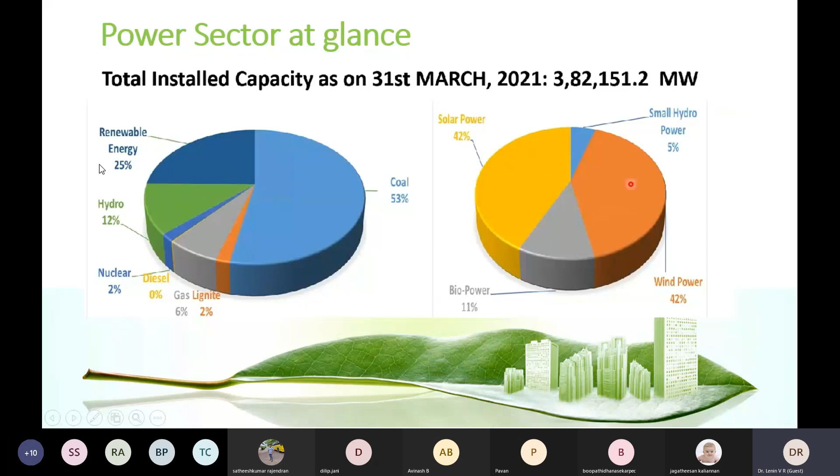So the major portion of the energy comes from thermal power plants, right? Only about one quarter of the energy comes from renewable energy, in total India. We know this: it is nothing but electricity generation, transmission, and distribution. So what does it mean? The major portion of electricity comes from thermal power plants.

In a thermal power plant, fuel is burned. The heat energy is transferred to the water. Then water is converted into steam. The steam is forced onto the turbine. The kinetic energy of the steam is converted into mechanical energy. The generator is coupled with the turbine, so the generator generates power.

Excuse me, sir. Yes, sir. There is a noise in your background, sir. Okay. Now is that okay, sir? Yes, sir. Fine. Just a moment. Now my voice is audible, sir? Is that clear? Yes, sir. Audible.

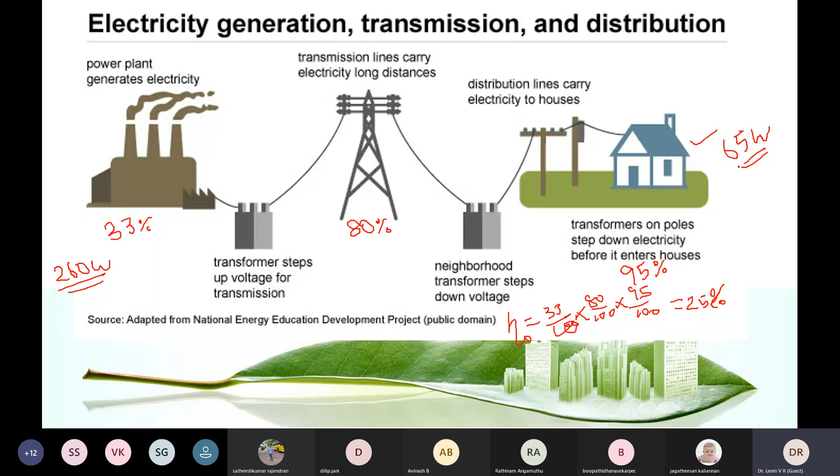We want to enjoy the benefits of the fan, right? So 4 times the equivalent energy has to be burned by someone far away from your place. So we should burn something like 4 times 65, that means 260 watts equivalent of energy has to be burned in order to get 65 watts of fan energy. So these many problems are there.

Then coming to the energy scenario in India, we are the 6th largest energy generating nation, and we are the 6th largest end user in the world. And conventional power generation is gradually increasing because demand is high.

Next, there is a gap between the supply and demand. The domestic sector consumes more energy. So this is all about the energy scenario. Coming to this next chapter, this is a very new one.

So here we have energy poverty. Energy poverty is the shortage of energy access to the modern world. We are calculating this energy poverty by an index, the human development index, which is an indicator. India's HDI is 0.639, so we are in 129th position among 188 countries, which means we are unable to access the energy to meet the modern goals or modern technology.

Coming to the building sector, according to the Bureau of Energy Efficiency, around 75% of the energy is consumed in the building sector, in which 30 to 60% of the energy is consumed for thermal comfort alone. And recently our government made a policy, housing for all. You might have heard about it. Housing for all by 2022 may bring new residential buildings up to some 3 crores and even more, according to government policy.

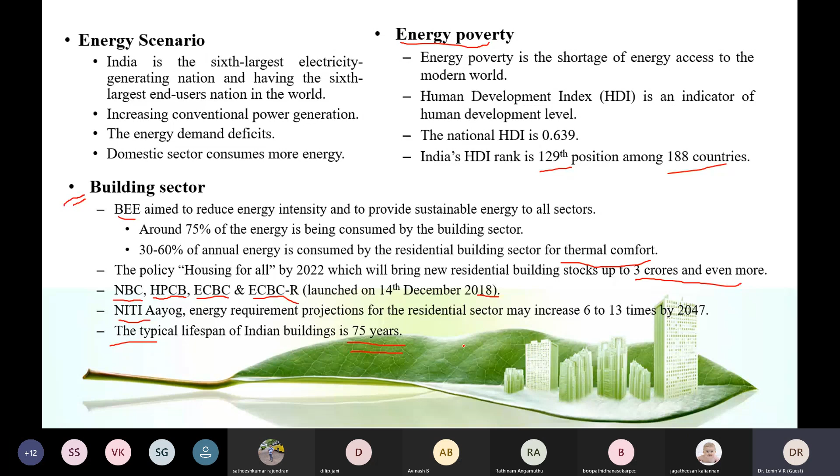This is very important. The typical lifespan of an Indian building is 75 years. I made a survey some 3 years back with several factors, a 52-question questionnaire. The important one, as you can see here, is the age of the building. Most of the buildings were constructed within 20 years. As discussed in the previous slide, the lifespan of a building is 75 years, so if the buildings are 20 years old, those buildings still need to go 55 years. So that is a very important thing.

The second important thing is that most of the energy is consumed during the building operation stage. What is the operation stage? It may be a little confusing. It is after the housewarming, when we enter or occupy the house. Whatever energy you spend inside the house after occupying is the operation energy, calculated until the building is demolished. So for buildings that still have 55 years to go, 89 to 93% of the energy is consumed during the operation stage. I was shocked when I saw this.

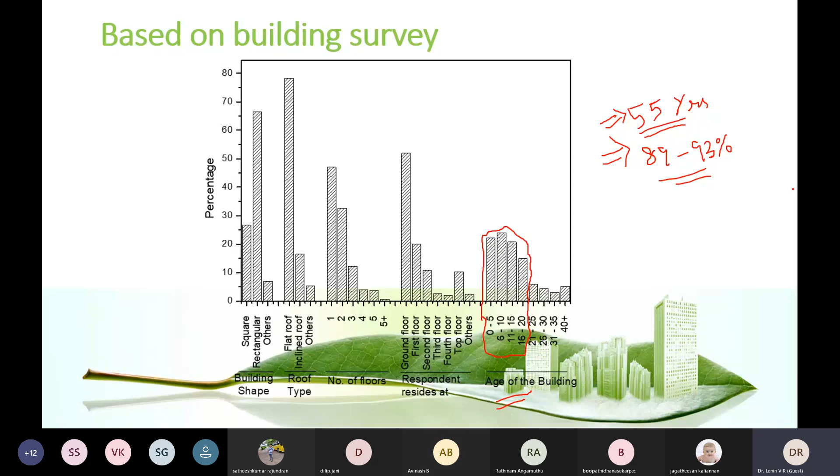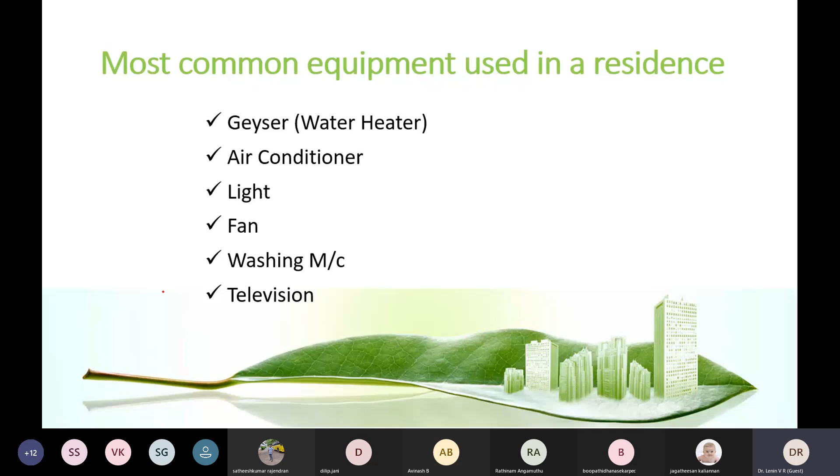In our residential buildings, what equipment are we using? Mostly geyser, air conditioner, lights, fan, washing machine, and television. These are the most common equipment for our routine life. None of this equipment runs without electricity. All require electricity, since most are based on mechanical parts. Without electricity, it is not possible to run them.

For supplying the energy, we have so many energy sources. As you know, oil, coal, natural gas, and nuclear come under renewable and non-renewable energies. Renewable energies are wind, geothermal, solar, hydropower, and biomass. So many types of renewable energies are there.

We are trying to phase out non-renewable energies. So renewable energies are what we are concentrating on nowadays, right now.

There are 7 different types of renewable energies available: hydropower, wind power, solar energy, biomass, geothermal energy, ocean energy, and hydrogen energy. Among these 7 energies, not all can be utilized or generated by a single person.

As an individual, I wish to contribute towards sustainable development. If I wish to go for these renewable energy technologies, let us see what technology is possible and what is not.

Hydropower is basically dam based. As an individual, we cannot build a dam, so this energy may not be viable.

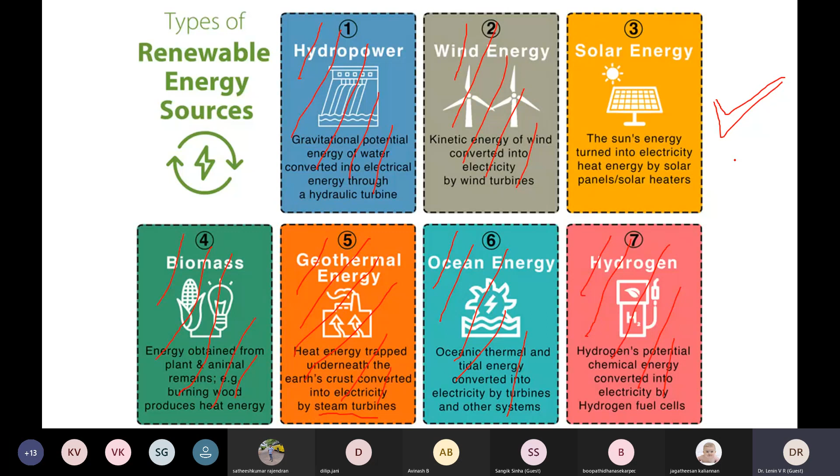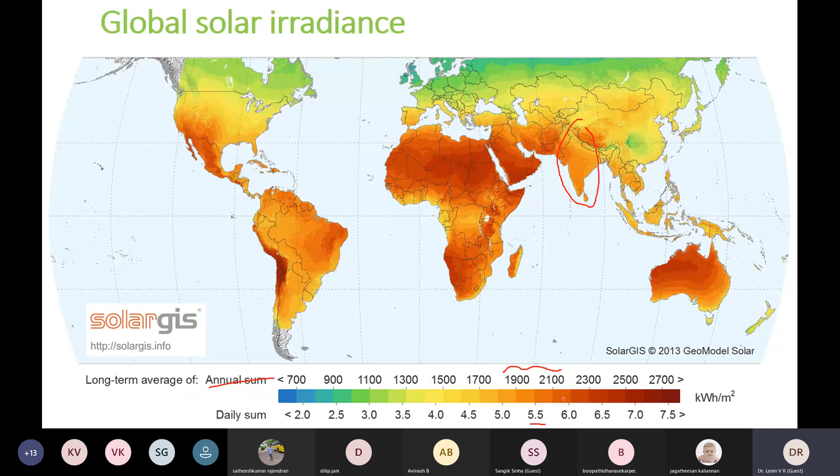Solar energy can be utilized in several ways. As we discussed earlier, when we convert one energy to another, there will be a loss.

What we are doing as of now is procuring electricity from some agency and converting it into a useful form, like geysers or hot water heaters. For that we are utilizing energy, so what will be the efficiency of that? Already only 25% of the energy we get from the thermal power plant, so if you convert this energy again into thermal energy, there will be further loss.

Solar energy can be converted into two forms: solar thermal energy and photovoltaic energy. It depends on the requirement. Every house requires hot water, so for that we can use a solar water heater.

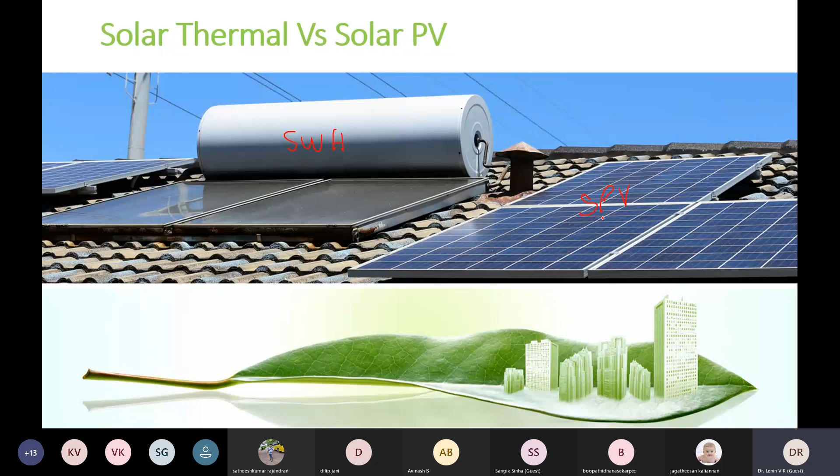This shows the solar water heater, and this one is solar photovoltaic modules, this is the cost. We have two options here. I'm telling you the feasibility in the building sector. In my survey, I have conducted research on one more thing.

What are the equipment used by an occupant to have thermal comfort? Only two equipment are used by these respondents: a fan and an air conditioner. Ceiling fan users are 88%. That gives some negative impact actually - it's a very worst usage. I'll tell you later why we are using it, why we should not use the ceiling fan.

Air conditioner usage is about 48%, and non-users are something like 52%. This calculation may have to be revised because I conducted this survey 3 years back, but things are changing now. Apart from these two technologies, around 90% of respondents responded that none of the other cooling energy methods are followed, which means they are relying only on fan and air conditioning.

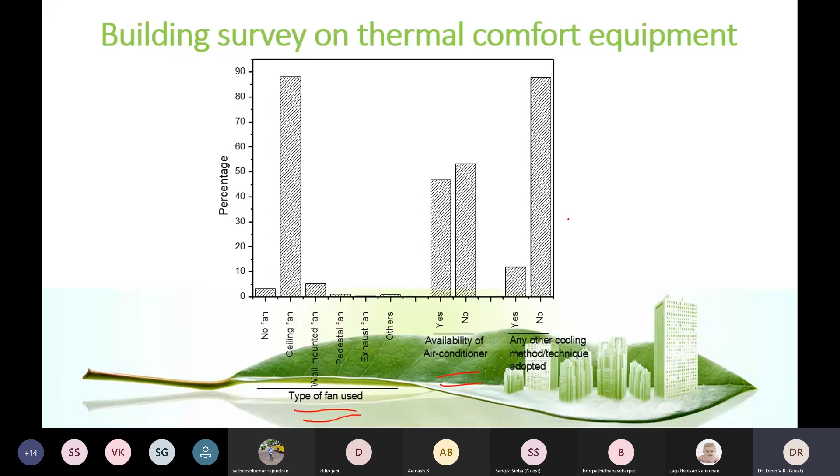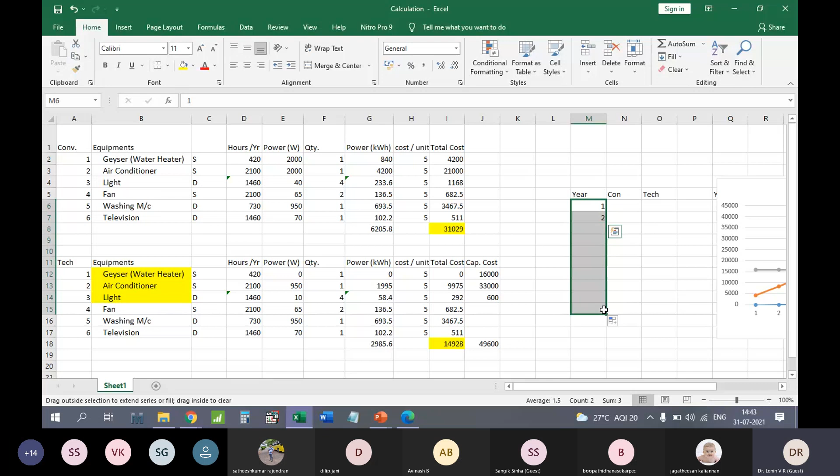So again, taking the previous case, conventional method versus technical upgradation: in the first year, second year, up to the 10th year, you are spending money while enjoying thermal comfort by means of AC. So 21,000 you are spending in the first year on electricity. Second year also you get the same 21,000 plus previous, so at the end of the second year you will be spending 42,000. Like so, if you continue enjoying thermal comfort, at the end of the 10th year you will be spending 2,10,000 rupees.

If you are upgrading to this latest technology, initially you are spending 33,000, that is the capital cost. In addition, you are spending something like 9,975 each year on electricity. So the initial cost, the first year cost, will be high, then each year there will be 9,975 as the cost of electricity.

21,000 actually makes 2,10,000 cost after 10 years you may be spending. So when continuing with the existing or older technology versus upgrading, you will be getting benefit. Let us see when we get the break-even: exactly from the third year onwards, you will be enjoying cost savings.

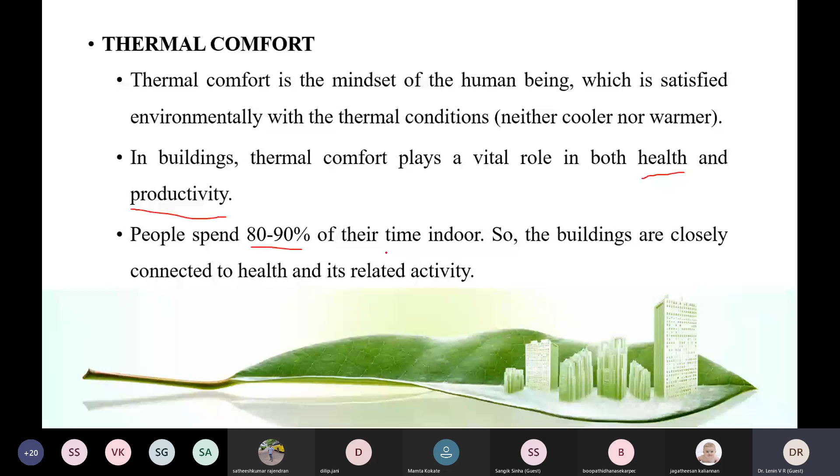In buildings, thermal comfort plays a major role. Why? Because we need to have a healthy and productive environment. So why is thermal comfort needed? People spend 80 to 90% of their time indoors. So buildings are closely connected with health and related activities. So we should have thermal comfort. If we do not feel comfort, then whatever we are thinking goes wrong.

So coming to the basics of building heat transfer. A building receives heat from the sun by means of radiation. Once it strikes the outer surface of the wall, from the outer surface to the inner surface it transfers through the conduction heat transfer mode. From the inner surface, it is convection. This convection heats up your indoor environment. In addition, indoor heat sources like human metabolism, equipment, and lighting heat up the indoor environment.

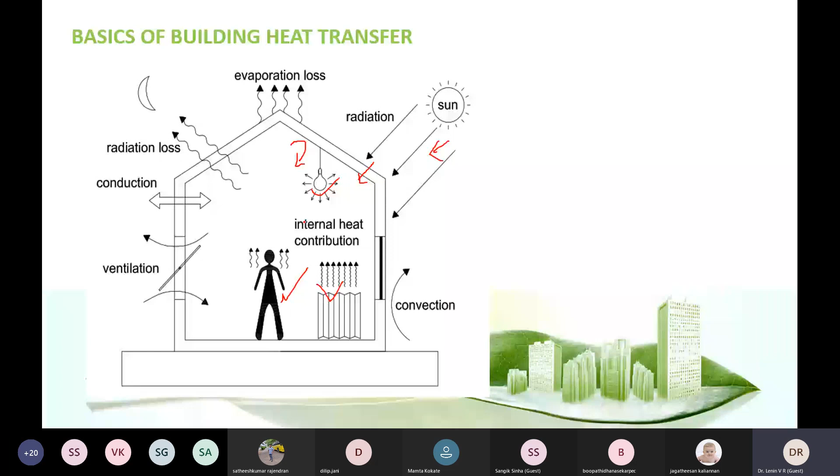So once your indoor environment is heated up, then you cannot feel comfort, then things go wrong. So in order to avoid that, usually we use several equipments, right? So before going to the equipment side, we should know what our environment is, because even a single solution may not be suitable for all people's lives. So we should know our environment first, right?

So according to this climatic zone map of India, India is classified into some 5 climatic zones: hot-dry, warm-humid, composite, temperate, and cold. Most of our South India and East India are classified under the warm-humid region. So what is the meaning of warm-humid? Air is a little bit hotter than the normal or the required one, and already the relative humidity or moisture is available in the environment. So based on these two things, comfort plays a role.

In order to have comfort, most preferably we use two equipments. One is the air cooler. I am speaking practically, about whatever equipment we have. So which one is preferable? Can you tell me? Air cooler or air conditioner? Most probably people prefer air conditioners or AC. Yes. So why? Because in olden days many preferred the air cooler, but now people want more comfort, so we go for AC. Yes, perfect.

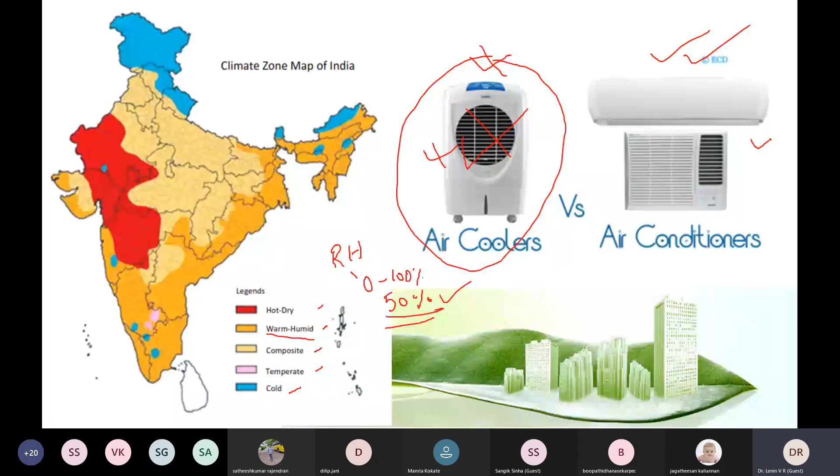There are 6 factors that affect thermal comfort: air temperature, relative humidity, air velocity, mean radiant temperature, clothing insulation, and metabolic rate. First, air temperature: as per ASHRAE standards, 26 degrees centigrade is an acceptable or thermally comfortable temperature. Coming to relative humidity, 26 degrees Celsius with 50% relative humidity is sufficient to have good thermal comfort. Then air velocity. Air velocity can be varied from 0.2 to 1.2 meters per second.

Mean radiant temperature, it's all about that environment. So today we need not speak about it. If time permits, later we will speak something about this. And coming to this clothing insulation.

So clothing insulation, actually when we are wearing shorts kind of a thing, that will come 0.2. If you are wearing pants and shirt, that will come 0.6. Clothing, CLO is the unit. Okay. So maximum, if you are wearing winter wear, that will come 1 clo. Right? So this matters a lot.

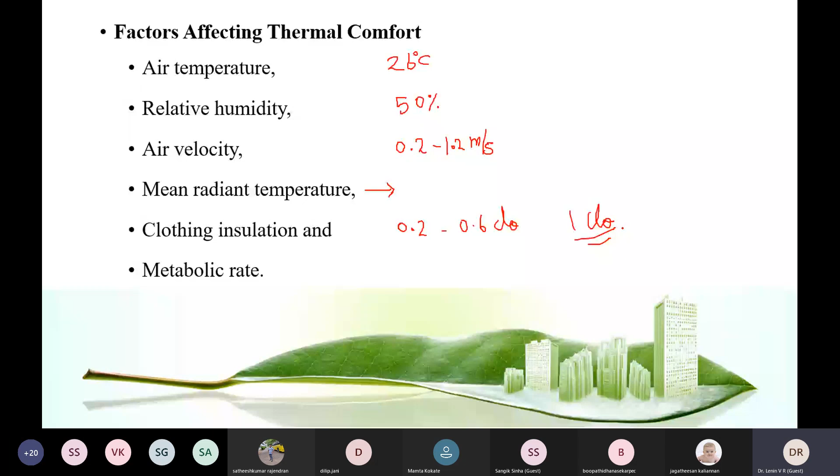If you are wearing winter wear, and if you are keeping the ambient temperature or air conditioned temperature at 17 degrees, then it won't give you thermal comfort. Correct? Then you have to keep minimal conditions like our environment. You should keep minimum clothing insulation. Like a pant shirt, somehow it's okay, 0.6 clothing insulation. That is required, right? So coming to this metabolic rate.

So we ourselves are generating heat. Why? Because we are taking food. That food is converted into energy. During conversion of that energy, an exothermic reaction takes place. Because of that reaction, our inner body temperature is 37 degrees Celsius. Our atmospheric temperature is 27 degrees Celsius. So because of the temperature difference, heat is transferred from our human body to the atmosphere. In that manner heat is transferred, right?

So depending on the activity, the heat liberation rate will vary, right? Energy is being spent. So when we are sitting, 100 watts will be spent, right? If you are doing any heavy work or exercise, something like 900 watts equivalent of heat will be released. So this metabolic rate will normally be mentioned in the unit met. That can vary from 100 to 900.

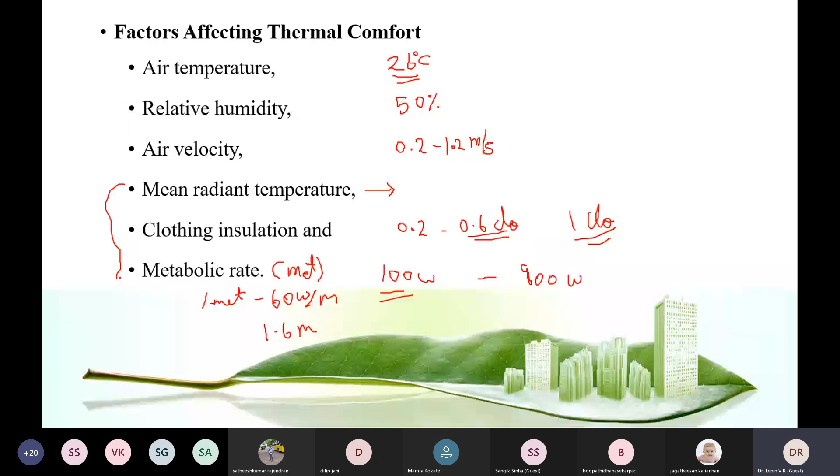So these three things are related to our activities and our building related matters. This is environment related matter, right? So let us see here. In order to predict thermal comfort, we have two methodologies. One is the PMV method, predicted mean vote method. So there is a standard.

So operative temperature I am keeping 26, air velocity is 0.1, relative humidity is 50%, metabolic rate is 1 met, simply quiet, seated, right? Clothing insulation is 0.61, so trousers, long sleeves. There are some 5-6 parameters; here 5 parameters are included.

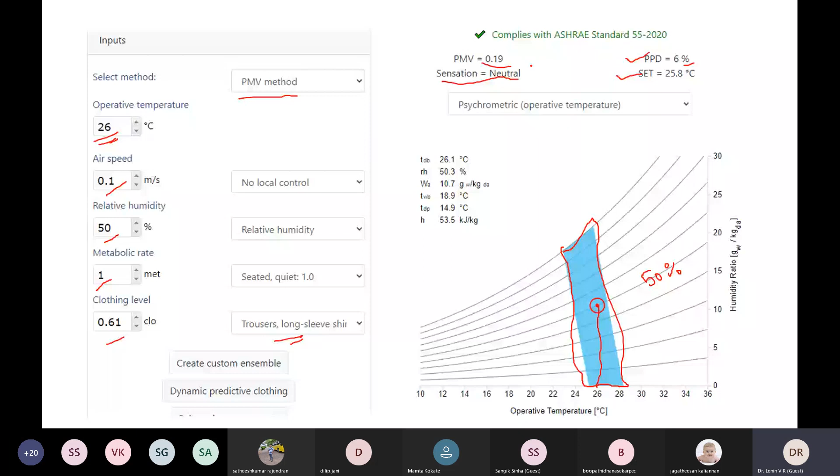So dissatisfaction: if inside the hall some 100 people are there, we cannot satisfy all the 100 people. Some 6 people may be deviated from the settings. So that is what predicted percentage dissatisfied we can have. This is derived by the ASHRAE standard, right?

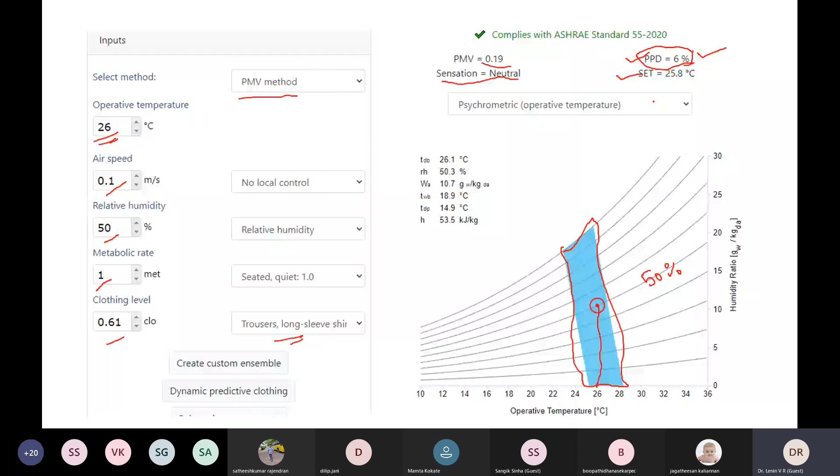So one more condition is there, the adaptive method. In that adaptive method, based on the outdoor temperature, we can adapt a bit. We are human beings, we can adapt a bit. So operating temperature or indoor temperature is 32. If the outdoor temperature is also 32, if you are keeping 1.2 meters per second air speed, a fan speed like that, then we will have this much of the region to play.

Okay. So the darker one shows 90% of the acceptable limit. The lighter one shows 80% of the acceptable limit. So now if the operating temperature is 32 and the outdoor condition is also 32, still we are in the thermal comfort zone only, right? This is what I want to tell you.

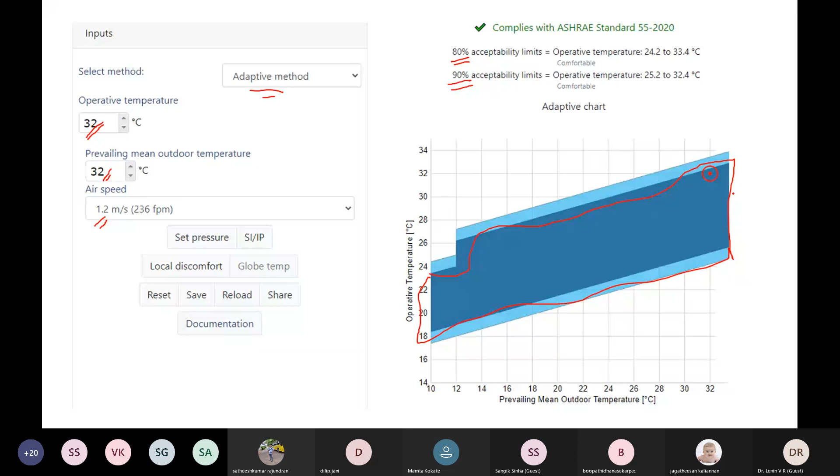So coming to building energy efficiency, there are a lot of scopes available to do some work. Minimizing the opening on the south. We know that the sun moves toward the south, so on the south side sunlight will fall on the building. So we should avoid openings on the southwest sides. Right? Cut down on the heat gains. Wherever there is a possibility that heat is generated within the building, that should be cut down.

So an optimal window to wall ratio has to be maintained. This is very important. Mostly we will have something like 4 by 3 feet windows. Most of the industries, like IT people, build the walls with glass, right? So there they will use more energy to cool the space.

You know that when the sun strikes a surface, part of the energy will be reflected, part will be absorbed, and part is transmitted through to the other side, correct? So if you construct the wall with brick or something like that, the transmitted energy will be restricted. In the case of glass, transmitted energy will not be restricted. So there is a high chance of internal heat gain, right? So glass with low solar heat gain has to be used, a low U value glass material, right?

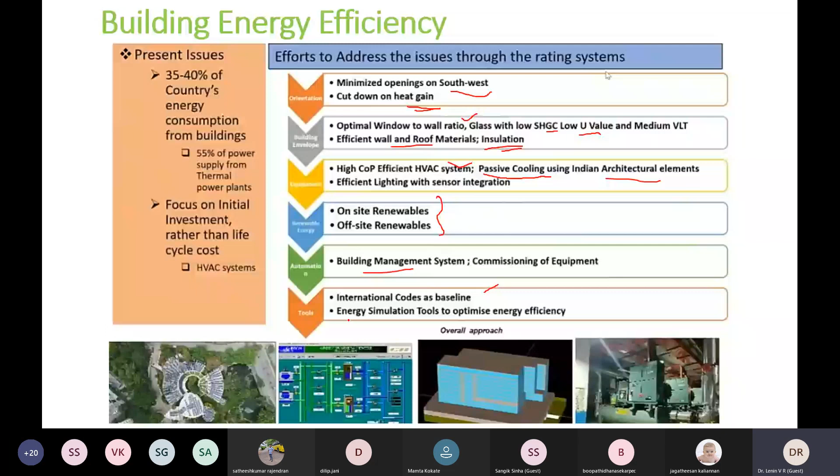So finally, two topics are there. One is net zero energy buildings. When dealing with net zero energy buildings, there are two technologies: active and passive. Today we haven't discussed the passive technology, that is orientation and envelope based. Active technology we have discussed so far. One part is energy efficiency and the second is renewable energy. With energy efficiency, we can efficiently use the air conditioner, lighting system, appliances. So far we discussed that, right?

Coming to renewable energy, we have only one option; solar is the option, right? Direct conversion we can do. For geysers we can use direct solar thermal conversion, which may help us make hot water. A solar photovoltaic system may help us make electricity. So this can be done, right? So what is a net zero energy building? That is the concept. At the end, I will tell you.

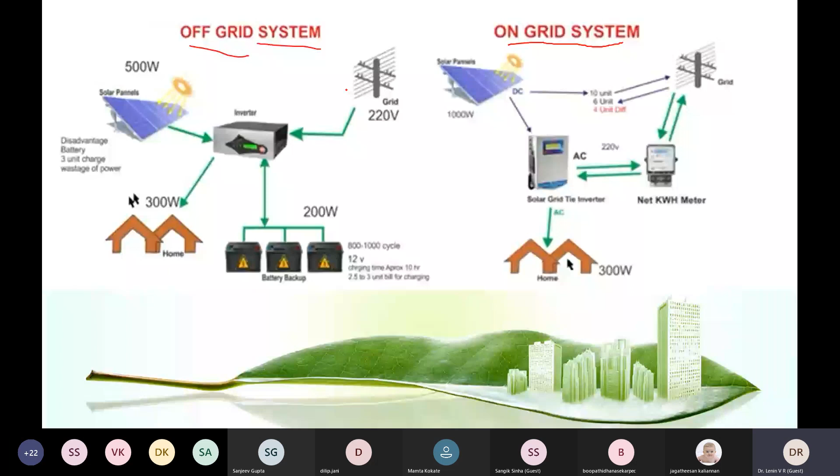So here on grid, off grid, you might be bored hearing about all those things. I don't want to spend much time on it actually. So off grid in the sense energy has to be stored in the battery; it's not connected with the grid. On grid, it's not stored; it's directly connected to the grid. Hybrid in the sense it's a mix of both together, right?

So then let us go for this calculation again. We've done this calculation actually. Here there's an important and interesting thing. Just for your remembrance, our central government, the Indian government, gives some subsidy for domestic solar modules. Let us say you wish to do a 3 kilowatt module. Based on on-grid, off-grid, or hybrid, the price will vary.

If you wish to go for a 3 kilowatt power module, you need some 300 square feet of area, right? That is the primary requirement. If you don't have any free space to receive the sunlight, then it is not at all possible. If you have that space, there is an opportunity, right?

If you go for 3 kilowatt, then per kilowatt, hybrid energy will cost you something like 1,14,000, right? So here we have 3 kilowatt, 3 into 1,14,000. It comes around 3 lakh. Actually, 3 times 1,14,000 will give you some 3,42,000.

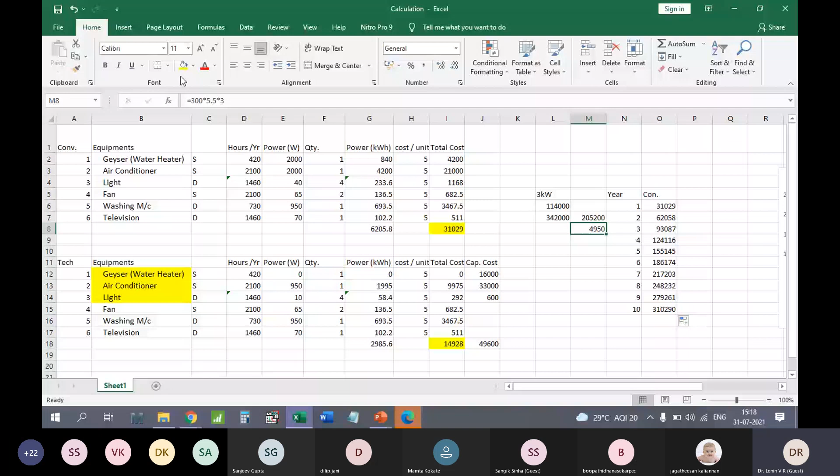Solar energy along with that modification, your initial investment will be 2,05,200. It remains the same, no change will be there, because your requirement is 3 kilowatt, 3,000 kilowatt, but we are producing around 5,000 kilowatt.

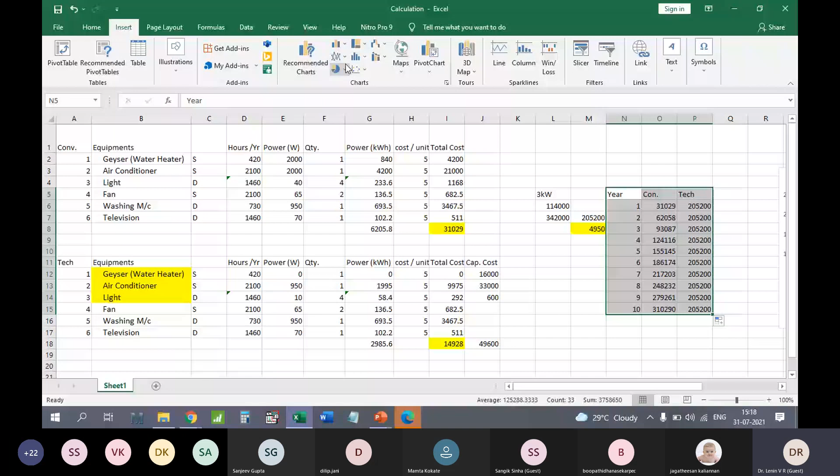You may utilize it. We are excessively producing the energy, so that can be utilized for future purposes. If you are ready to go for it, then you will get a break even after 6 years. Nowadays, people are telling that photovoltaic serves you 25 years.

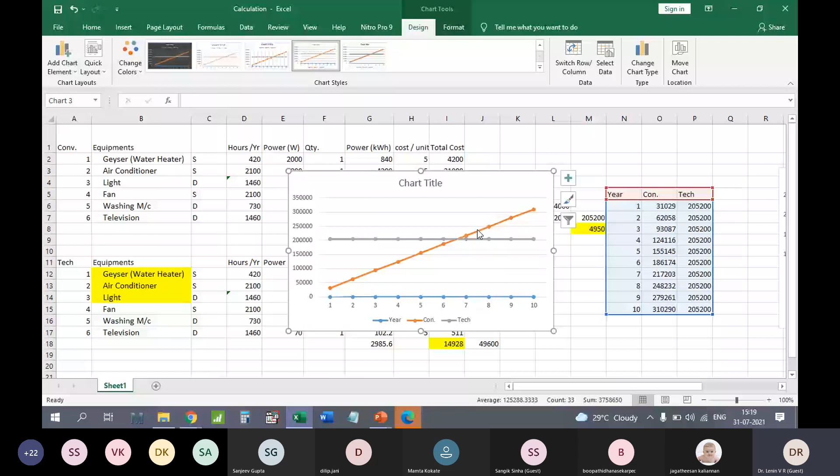Then last, there is one more topic, that green building. So green building is one which conserves natural resources, less water usage, optimizes energy efficiency, generates less wastage, provides healthier space. This can be spoken about for another one hour actually. I'm not expert in that area, but this is what everyone expected.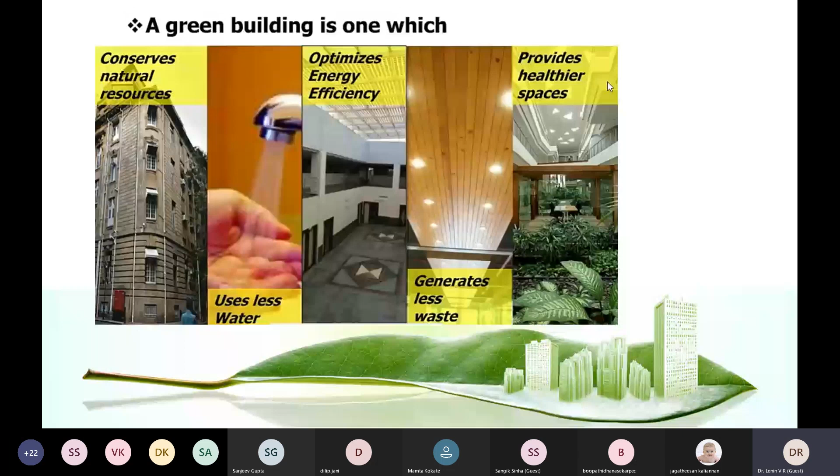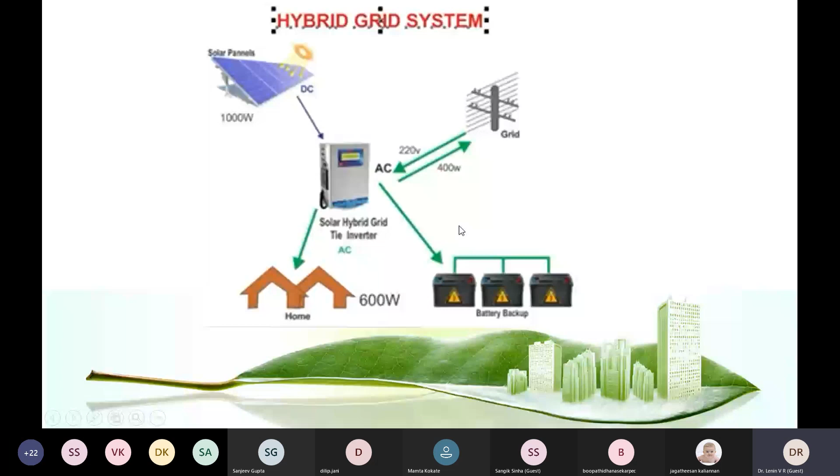Just one more time, I wish to go for this. So we discussed something like net zero building. Net zero building is nothing but, after implementation of these techniques, your building no more requires any of the energy, no more requires any electricity energy from the grid. You can produce it by your home. So this is known as a net zero energy building.